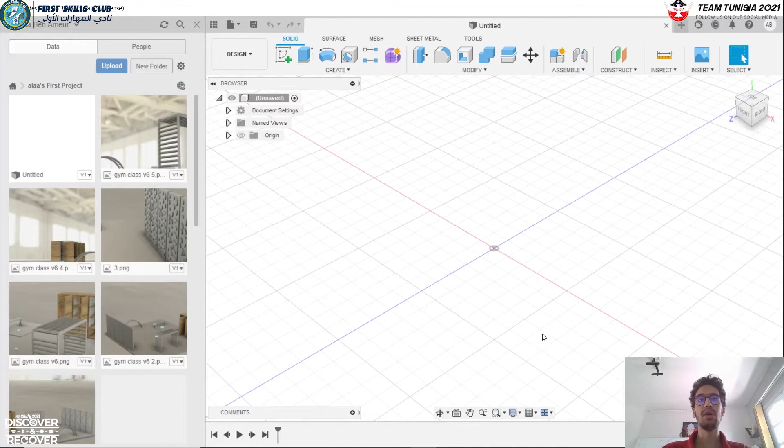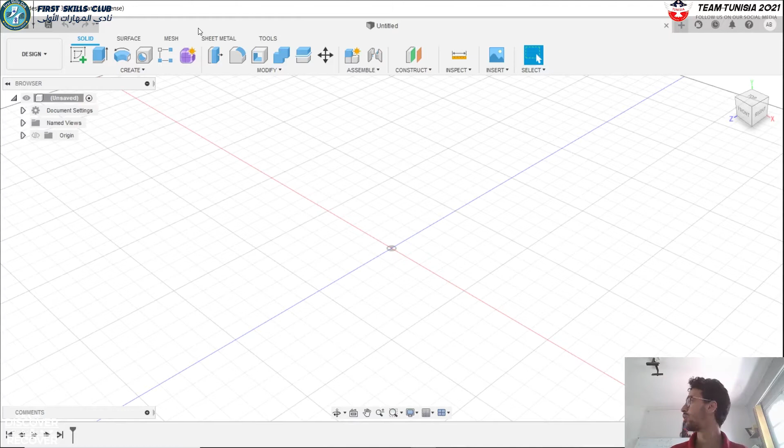So in this workshop, I'd like to share how to start design thinking your CubeSat, and the different ways to exploit 3D software to recreate it. There are two types of teams right now: those who already made their CubeSat design, and those who haven't. For those who already have a design, it will be easier to recreate it in 3D since they already have the shape, can take dimensions, and redo it. For those who haven't made their CubeSat yet, this video should help too.

As we know, the CubeSat is a cubic shaped satellite, and in 3D, the main part you're going to take care of is the outside structure of the CubeSat. So let's go ahead and make a cube first.

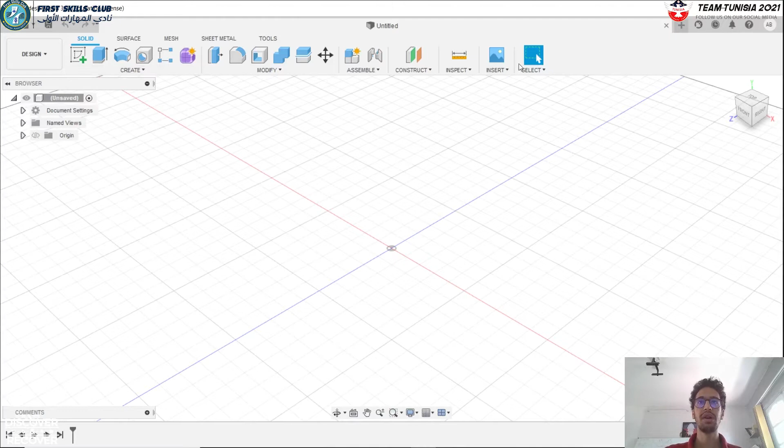I'm using Autodesk Fusion 360 in this case, the software provided by Autodesk. I've been working with it for many years - I can't really count - but it's a very helpful, easy to use, and professional software. It has a section called the design environment, with a create option where you'll find default shapes such as the box, cylinder, sphere, torus, and so on.

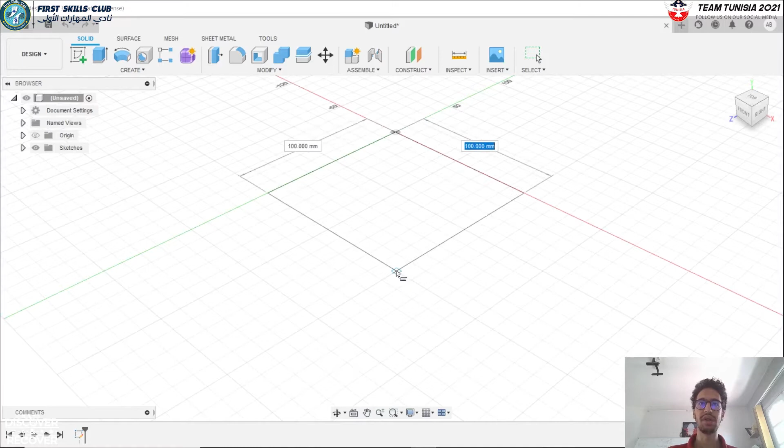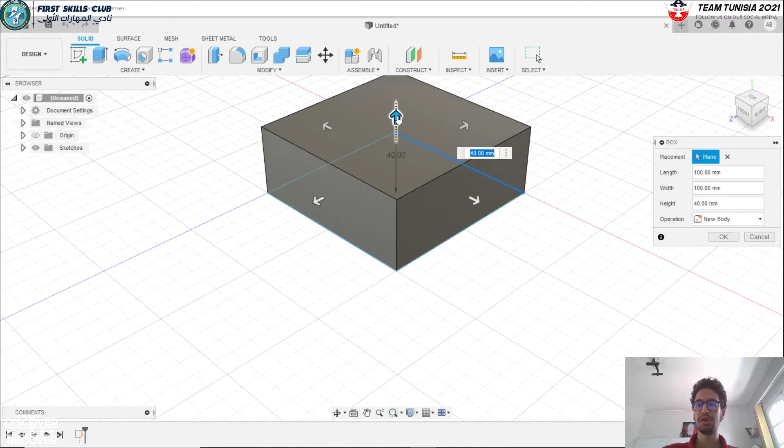In this case we're going to choose the box and make a cube. Our cube is supposed to be 100 millimeters, which is 10 centimeters. I clicked on the first dot and expanded it until it reaches 100 millimeters on two sides. Now I've got a box - it's not a cube yet, so I'll add the third dimension, the height, also 100. I can scroll the arrow or type 100 with my numpad. I pressed enter, and now I've got my cube.

Just as a notice, I'm demonstrating how a CubeSat would be designed, but the design itself might take different approaches. Our cube right now is actually filled from the inside, it's not empty. From this cube, you can start thinking about how your cube is going to look, but not yet how it's going to be assembled or created in real life.

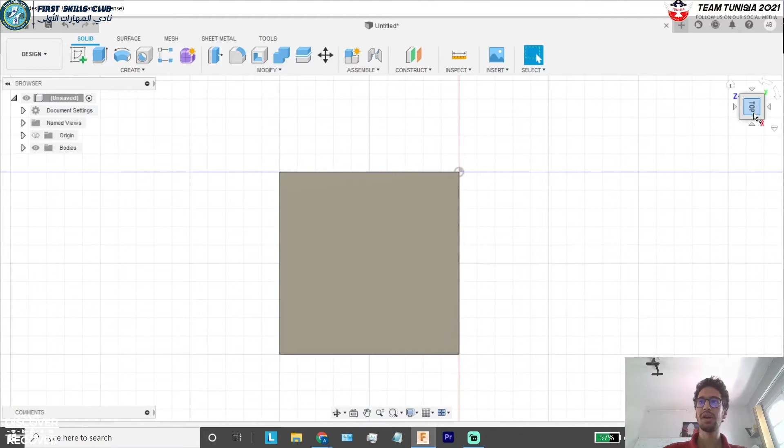We're going to make it empty from all sides first. How I'm going to do that is basically by making another cube inside this cube. I'll try to make it clearer: I'm going to select box again, then select this face, the upper face of the cube, because that's where I want to work.

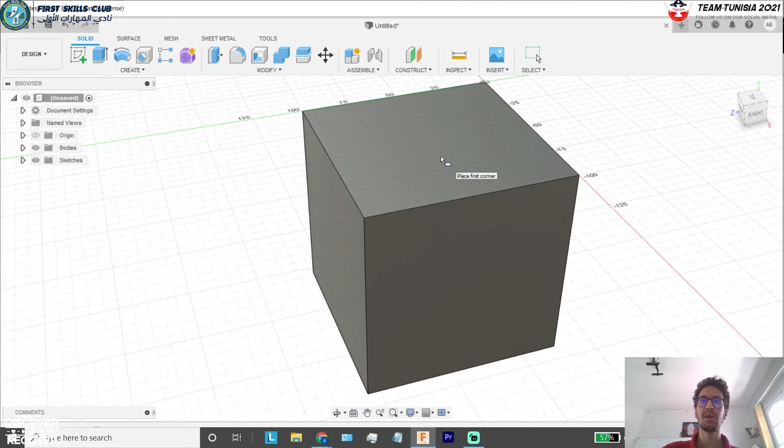And I'm going to make another cube. But first I need to make some calculations. So you can see here, this is 100 and this is 75 millimeters, of course. Each square here has 5 millimeters of length. What I want is to calculate the thickness of each part of this CubeSat.

So 100 minus 5 is going to be 95, then 90, then 85, then 80. I recommend actually having it 80, with each face being 2 millimeters thick - 2 centimeters thick, sorry.

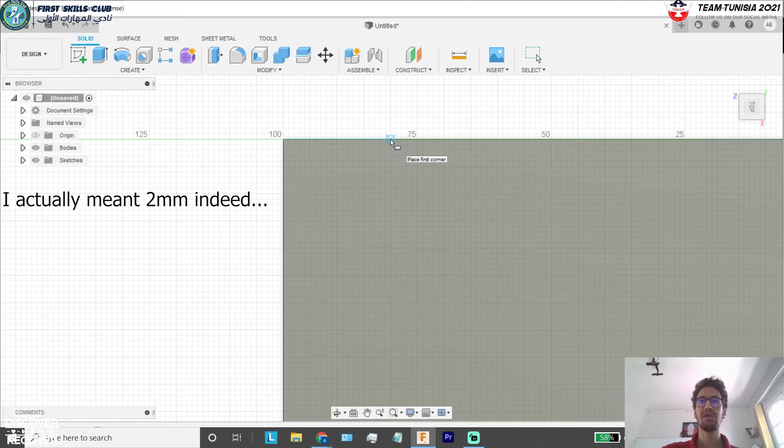So we're going 4 squares from here, 4 squares from here, and we selected our point. We're going to do the same thing here. Actually it is rather easier now. You can see that these are 2 squares right now, so I can just choose 2 squares from here.

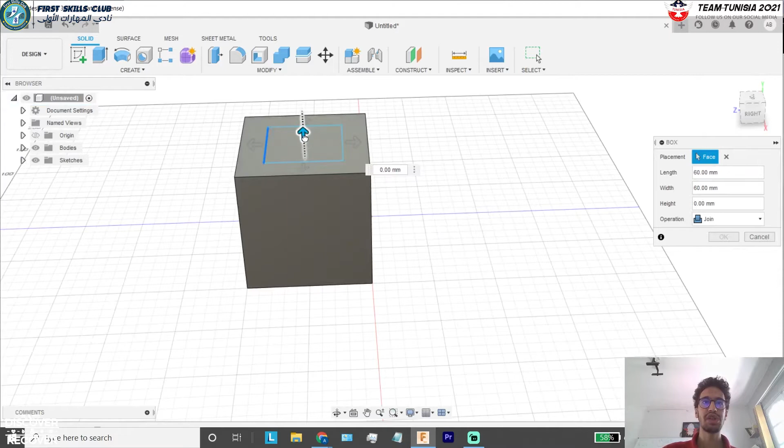I've got my box, and then this arrow, I'm going to pull it down. You see how it's becoming red? That's because it's cutting through the initial box. And I'm going to press OK. I'm going to repeat this 2 more times.

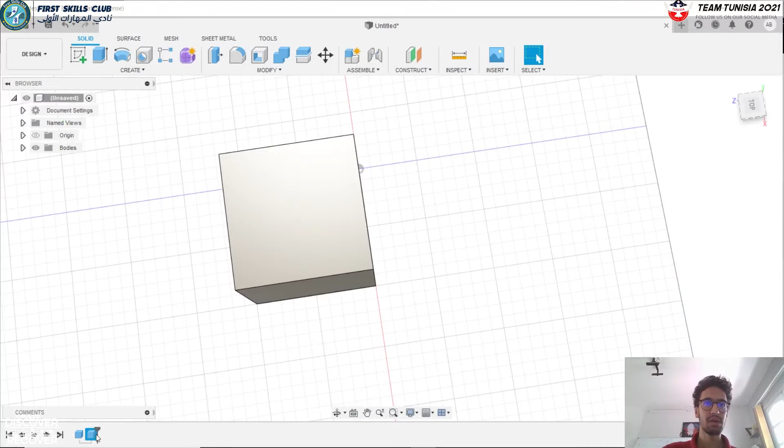Okay, hold on a minute. I think I miscalculated it. Sorry. So concerning the second box, yep, I did miscalculate it. So it is supposed to be... yep, now it is 80. It is 70, yep, now it's much better.

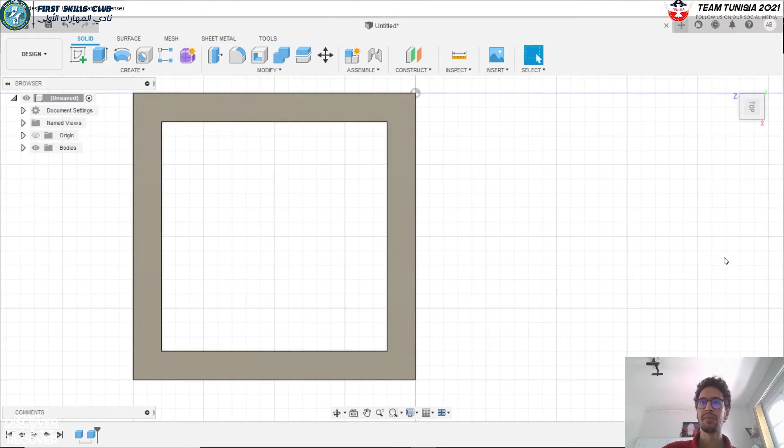So as I said, we're going to repeat this 2 more times. Create box, going to choose the face you need - this is very important. And you're going to make a similar cube, and you pull it in so it cuts through the whole thing.

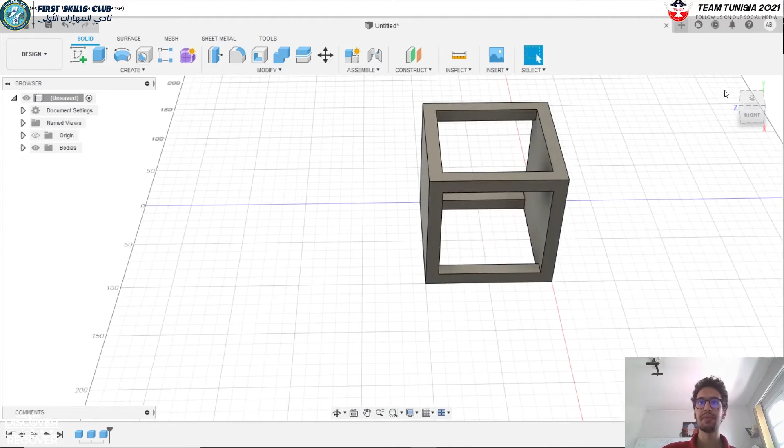We're going to make just 1 more box. Like the boxes we're using now, they are purely to cut through the first one. They aren't to make other boxes. And we press OK. So I think we are getting a bit into shape.

Like we're starting to know more about our CubeSat. How is it going to look? So the 6 faces of the cube, they will likely be empty. Of course, this can be regulated later.

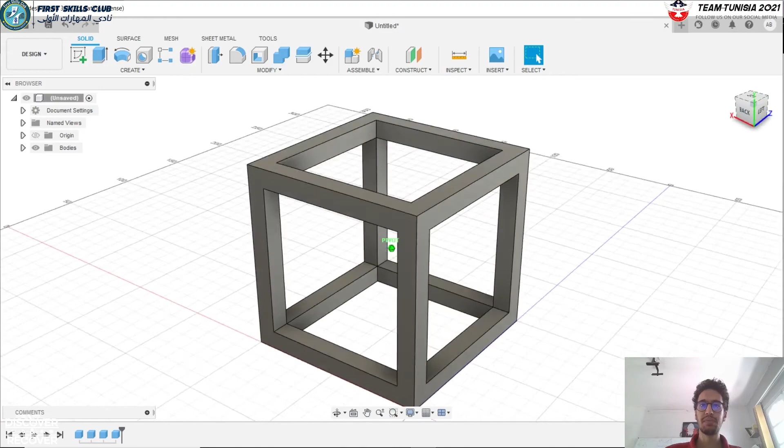So we have our cube here, the CubeSat so far. And now maybe we are going to make the shapes. It's not a bad idea. I think we can start by that. So how are we going to make those shapes? Let's start in an easy way.

We're going to look at this cube from the front. As you can see, I have this cube over here. When I turn it, it turns the whole design. I can select front and it will bring me the front face of the cube.

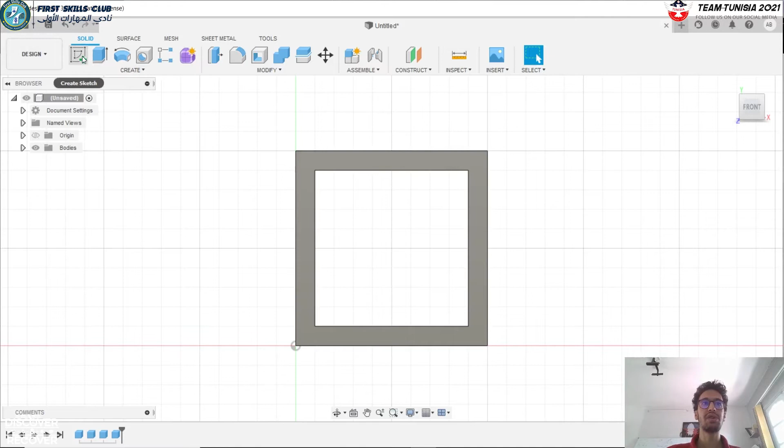So I'm going to actually use now 2D. What I've been doing a bit earlier is using just 3D tools, making something in 3D. Now I'm going to make something in 2D, which is basically me drawing something. So I'm going here to select Create Sketch - sketch is basically the 2D tool of Fusion 360.

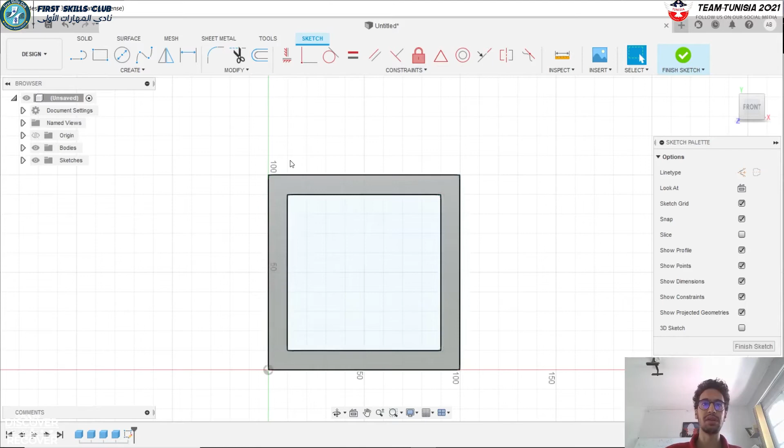I'm going to select the face, like this face, because it's the one I want to use, not another one. I'm going to select it. Now you see how this bar has changed, the tool has changed - that's because I just entered the 2D environment. So what I'm going to do now is make drawings.

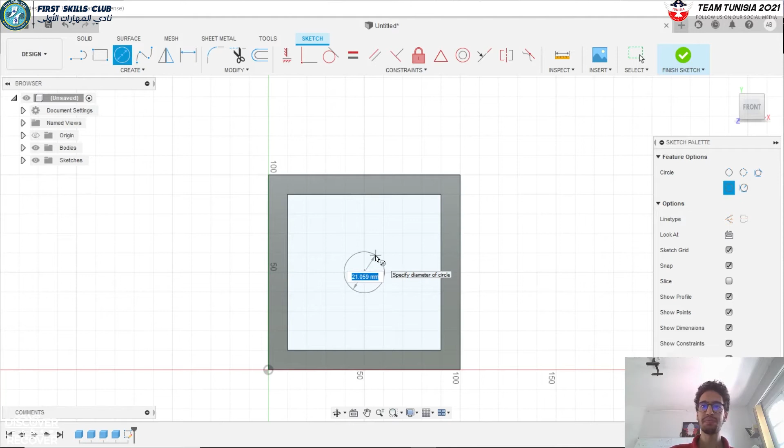So I'm going to choose a circle. You can pretty much know what is the center of this rectangle. Fusion actually gives you indications with your cursor to understand - for example, you are here, you can see it is doing X and a triangle, which means it is the middle of that line. If you go away, you can see an interrupted line going through until it intersects with another interrupted line in a perpendicular situation. So all you do is click on that point, choose your circle, choose the diameter. In this case, I'm going to do 30.

So I made this cylinder, where it might appear to be a bit big, so I'm going to turn it into 35 and then make another cylinder with the same center, which is 25 millimeters in diameter.

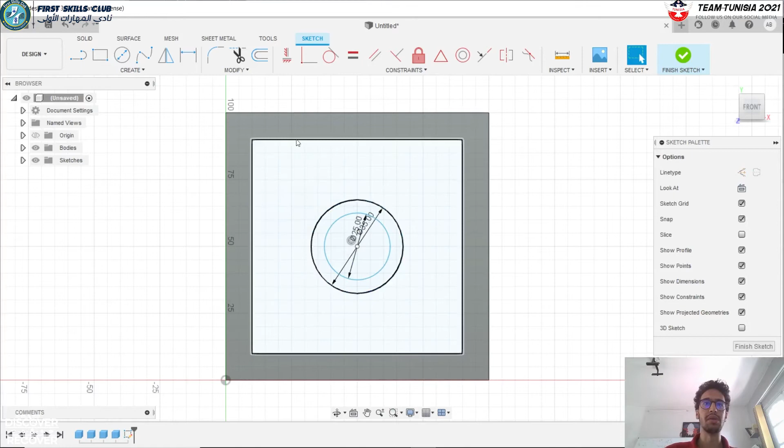Now what I'm going to do, it's not making these holes here. I'm going to actually make those bars that attach this face of the CubeSat to the rest. So even if you haven't understood clearly, I'm going to explain a bit better. Just one second, so we've got this corner here.

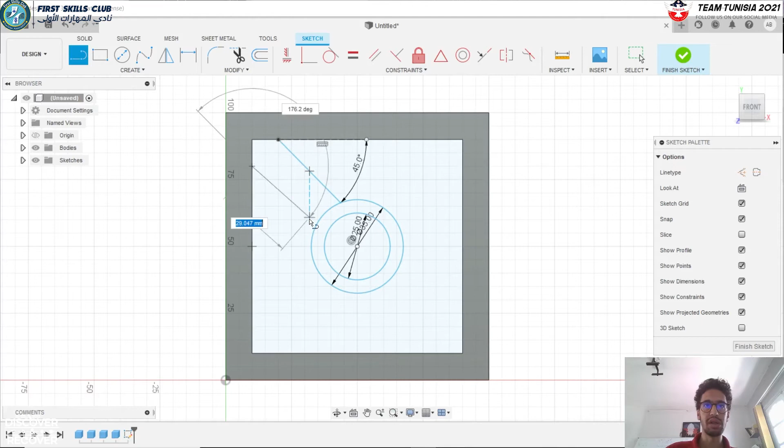We're going to make it 45 degrees, and I just wanted to intersect with this circle. Same here and same in here. I'm going to make it, okay, it is 180 degrees, it's fine. And I'm going to make it intersect and parallel to this one. Of course, I'm going to link them to each other because we want it to be a closed shape.

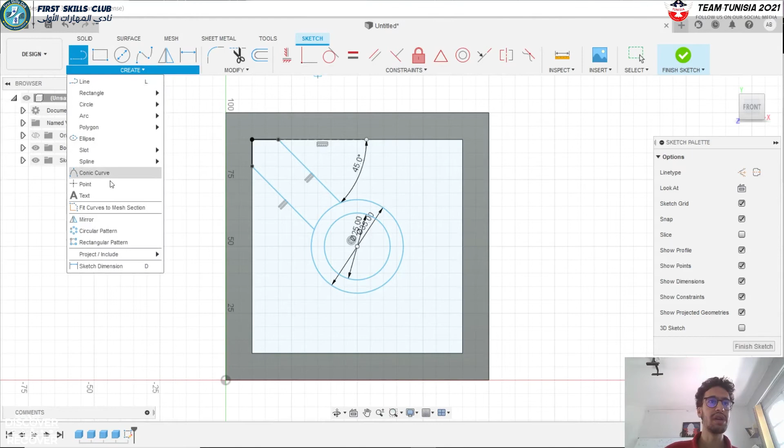And well, it is so good so far. What we can do actually now is not do it again, but actually recreate it, and that can be done with a circular pattern. Pattern is a tool for duplicating stuff in Fusion 360. What I'm going to choose is this object, and then the center point will be this one. It's going to rotate and make similar ones around it.

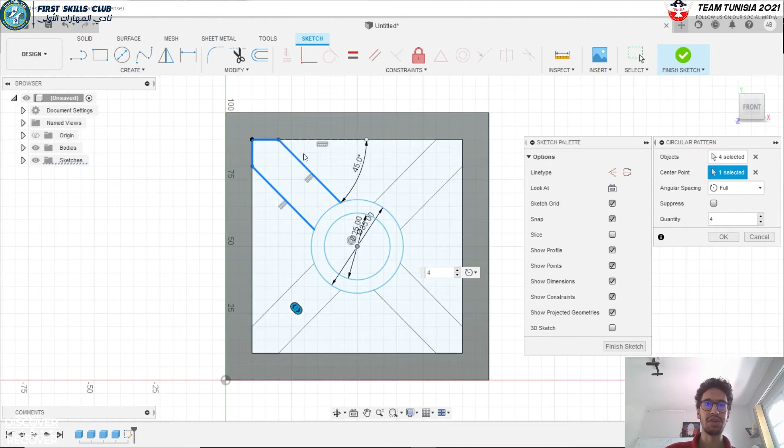So I'm going to put 4. As you see, it counts the first one, it did 4, and I'm going to press enter. Now we've got our shape basically, and yeah, so far it's so good. I'm going to exit now the 2D environment by clicking finish sketch.

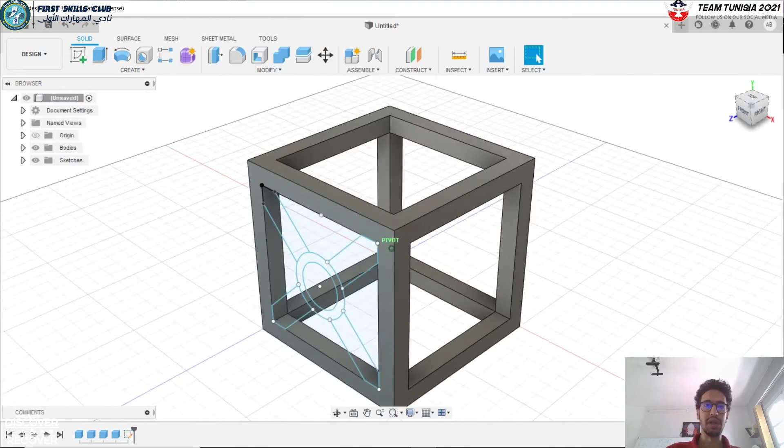Okay, now we have a drawing here, and we don't have it on the other faces. So what do we do? Actually, we're going to do something similar to that pattern, but just in a minute. So we have a 2D looking sketch here. What we're going to do is to actually turn it into 3D. And as hard as it might sound, it's actually rather easy.

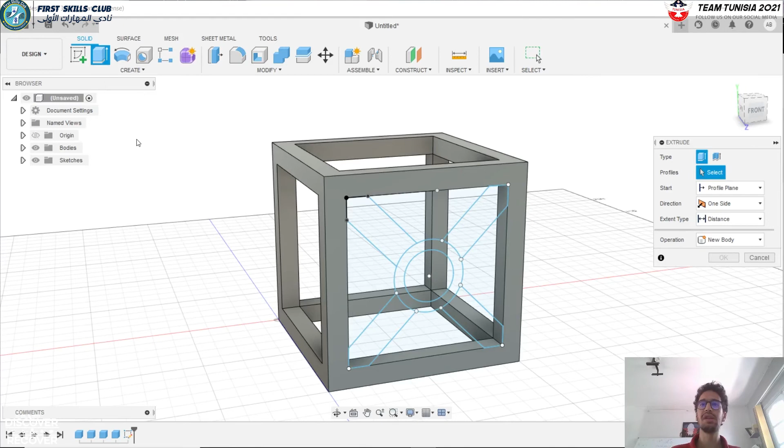You have this here, it's called the extrude tool. The extrude tool simply gives your 2D shape a height. So it used to have 2 dimensions, now it's going to have 3. And you're going to select carefully your faces. So we've got these that we made earlier, and this center circle.

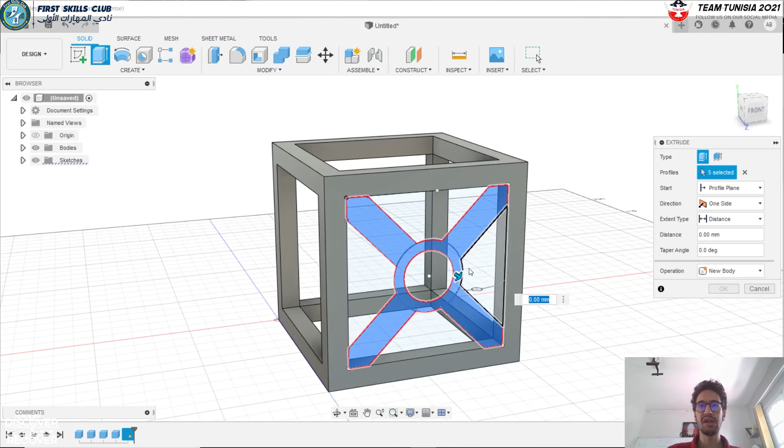Now you've got some sort of X-shape with a circle inside, and what we are going to do is pull it back so it will have a height now, and of course it's not going to leave the premises of this cube, so it doesn't pass the 10 centimeters rule. And we're going to press OK.

So you see here now we have just one face. We want the other faces to go, so we're going to go with create pattern, but this one is pattern on path. Pattern on path is basically taking a path and just repeating the same thing over it. So in type we're going to make sure it's selected features. As we are going in objects, once selected we're going to select this last extrude.

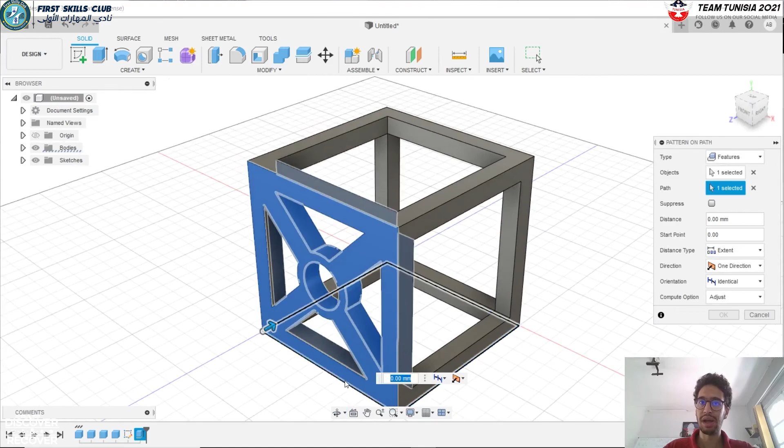You can see it here down in the timeline. Timeline shows you the history of your actions in the 3D project. You're going to select it, and then in the path you're going to select the bottom rectangle. That way we are going to select and replicate this 4 times only, and you can go like this.

Oh yeah, don't forget, put it here on path direction. When you put it on path direction and give it a closed path, which is in this case a rectangle, it's going to repeat it the same way.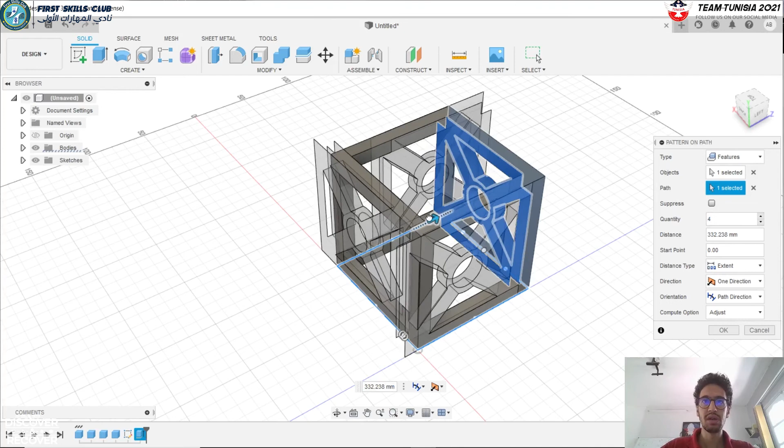Okay, but now we need 4 instead of 3. So there you go. And you see here the distance is 300 because each side is 100 millimeters long. So 100, 200, 300, you've got it. And now we've got all these faces done.

Okay, now you might wonder, should you do the same now to, let's say, the bottom and top? In this case, it is possible, yes, although I might not really recommend it.

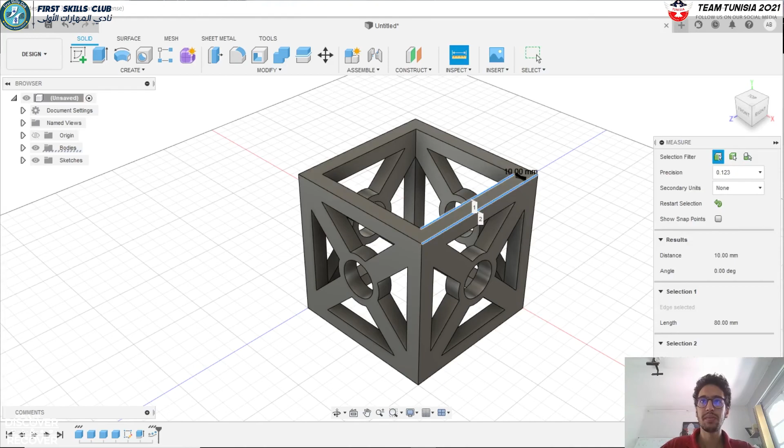So how about, let's see, we make something to cover this cube with, and we can cover it actually with whatever we want. So let me look for something. I can actually go with a cap that fits in and comes out. We can have it, let's say, jointed. In joint I mean something like, you know, it opens up and down. It's like the trunk of a car.

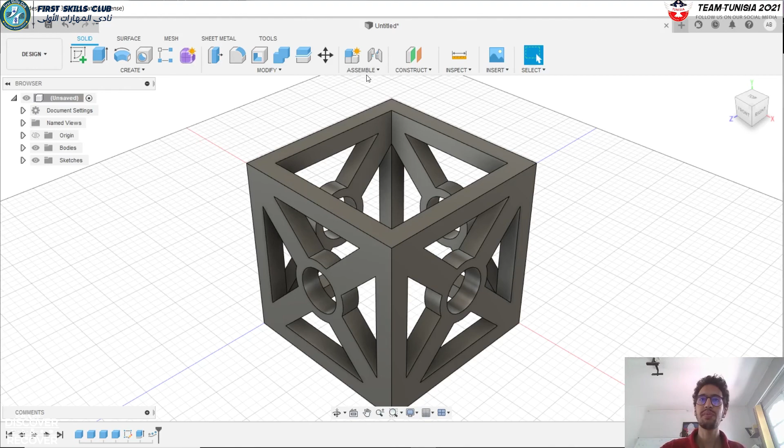Now we were talking about how to make a top and bottom bases. Well, in here it depends. How do you want them? Do you want them open? Do you want them closed? Do you want a way that will let you enter or disassemble the cube itself? It all depends.

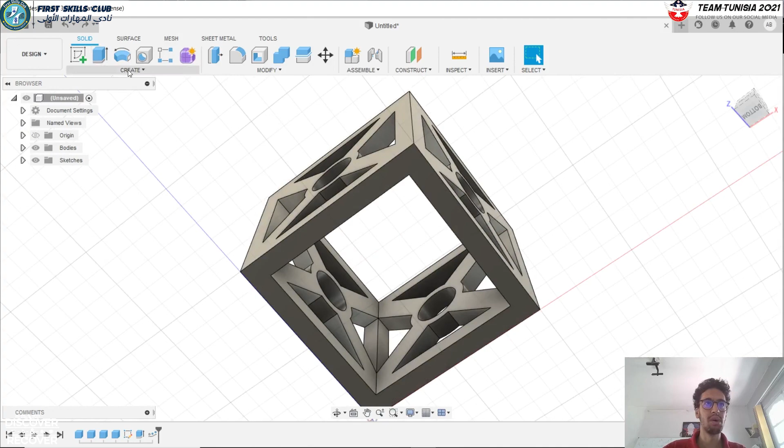So we can actually close the whole bottom just like this. So we're going to make a box. We're going to choose from side to side, and boom, it's closed. You're just going to make it look more okay by doing like this.

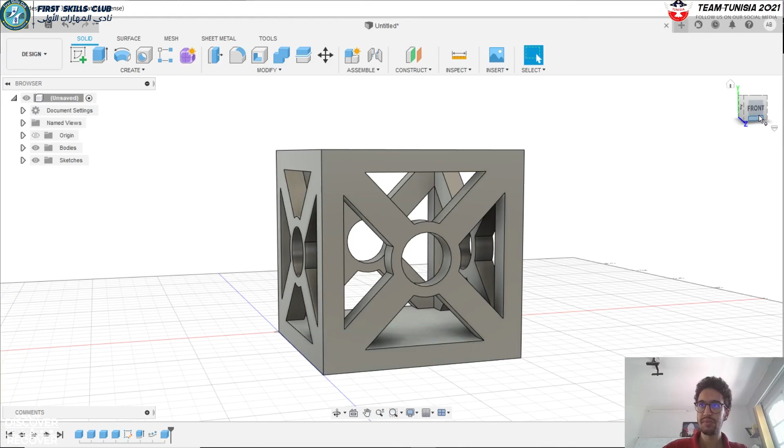So that could be your CubeSat, but of course we're just talking about the design thinking. So if you have a 3D software, just give it all you can, like make different designs, different approaches. You don't have to go by the rules at the first times, but then you can know more of how to actually make your cube.

So that's it for now for the design thinking. I hope you liked it, and see you in the next one.